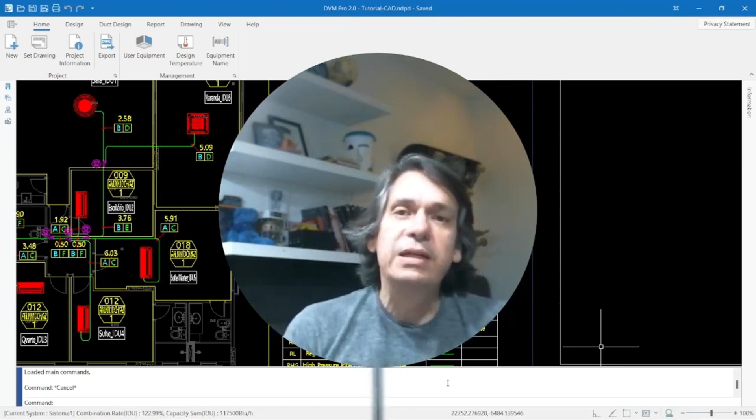Which is very simple, very easy to use, but it also has CAD mode, a very cool tool available completely free of charge, which allows you to design and draw your VRF system directly on a DWG plan without needing to have a CAD program on your computer.

CAD software, as everyone knows, is extremely expensive, and here we offer you the option of creating a VRF project on a plan drawn in AutoCAD using completely free software.

You can receive a plan from your architect, make your project on it, position your machines, return with this plan to the architect, and he will lay out the electrical, ceiling, and everything else.

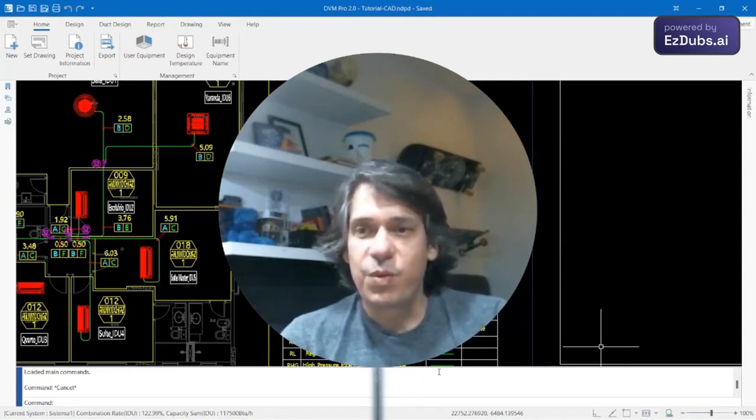Thank you, let's go. So we open the initial window of our software here. I assume you are already creating your flowchart in sales mode, which is the program's default mode, okay?

And we will now do in the designer what would be CAD mode. So let's click here on CAD mode.

First step, new, let's make a new program. As we are talking about CAD mode, most of the CAD programs, the commands, are all in English, so we think it's better for you to work in this mode. If you change the program language to English in the settings, it should already be set to Portuguese by default. So we come here to general configuration and set it to English. I've already done this. You will change it from Portuguese to English. It will ask to restart the program, and when you open it again, it will be in English.

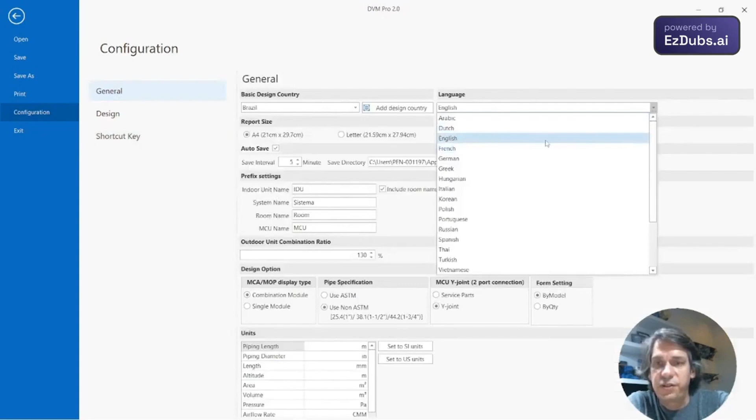So let's go here to new, which is a new project. Our project here will be the Tutorial-CAD, country Brazil, city - I will put São Paulo.

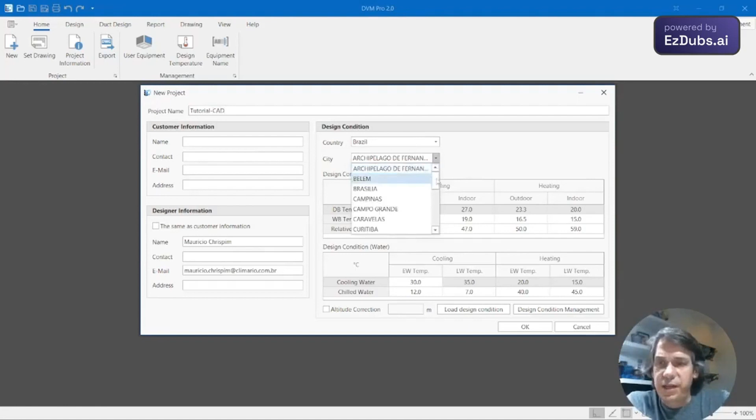Second point, we have to have a drawing. It's already ready in AutoCAD. You can start drawing straight away, but you are creating a project. It is assumed that you have an architectural plan in DWG, so you have to import this plan in DWG - the one the architect sent you.

So set drawing. We're going to pull our environment here, it's an apartment, a residential application. We're going to condition 6 environments. We have a living room, a balcony, an office, a master suite, another suite, and a bedroom. There will be 6 evaporator units of different types. As it is an apartment, it only has one floor - we will provide this information here.

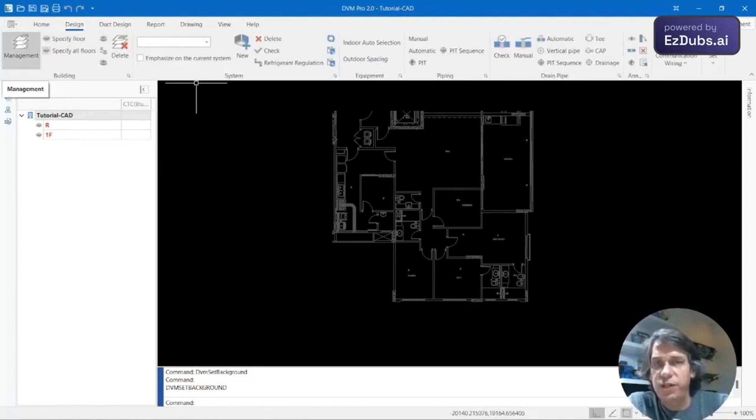So now in the design part, we come here to management, which is the management of our environments. I click here on management. Right away, it's going to show 2 floors, which would be the first floor and the second floor - it would be roof, it would be coverage. So this first one, this floor here which is the coverage, I will delete, erase.

Important information here: it says floor height - that would be the height between floors - and here ceiling height, which would be the height from the floor to the lowering, if any. In this case, it will use the standard lowering, then the standard height, 3000, 2800.

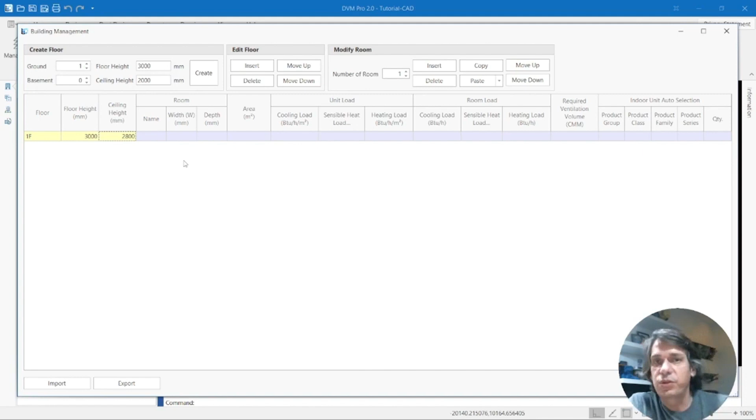All measurements here in the software you have to use in millimeters. So your CAD drawing, for example, if a wall is 3 meters, in CAD it will have to appear as 3000mm. If you have it in centimeters in your drawing, you will have to rescale it to make it millimeters, okay?

As I said, there are 6 environments, so we're going to insert, modify room here - insert 6 environments into our project. Insert, insert, insert, insert, insert until you get the 6th one, okay?

Our first environment will be the living room. Second environment, the balcony. Third room will be the master suite. The fourth room will be the suite. Fifth environment, the office, and the sixth room is the last room. It will already be appearing here in red: first floor, living room, balcony, master suite, suite, office, and bedroom.

Okay, I'm going to change this one. I'm going to remove this 'first floor' and I'm going to call it apartment 601. Our first point, click here on apartment 601 and come to the specify floor window - we will tell you where this floor is.

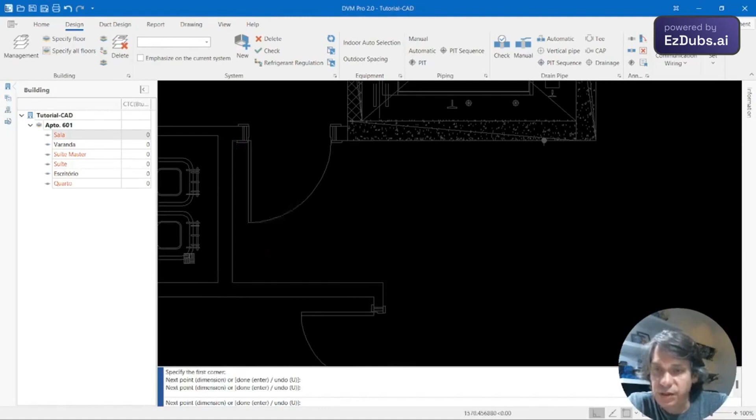Then it asks me for the first corner. I come here too. Second corner, third corner, it already starts to open an area. Come here for my third point, fourth point, fifth point, sixth, seventh point, because it didn't get it right there. Okay, my room is now selected.

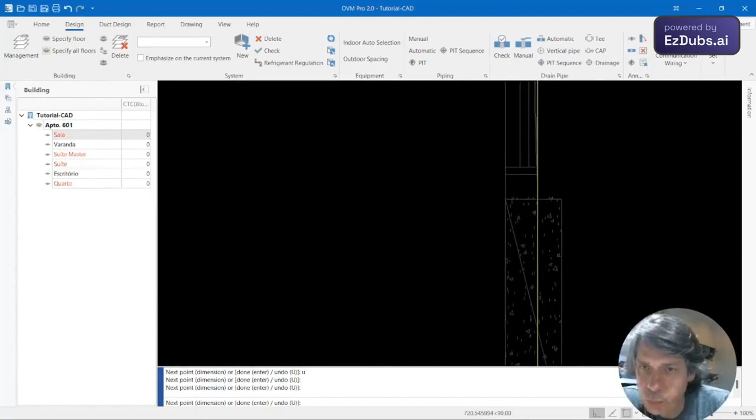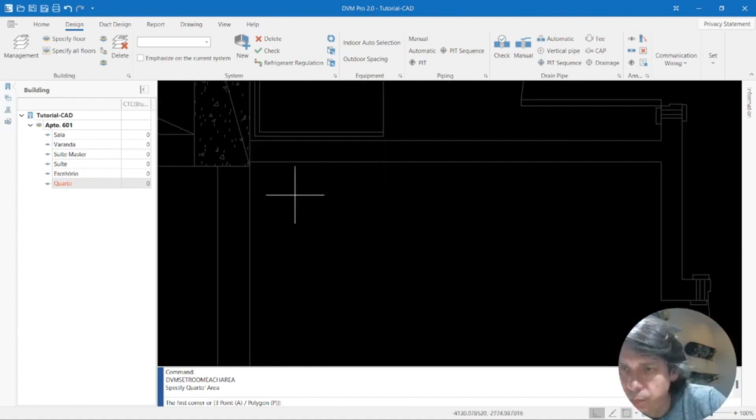And now our last room, which is the bedroom. Specify room, and now our last room, which is the bedroom, specify room. Okay, I have my 6 areas.

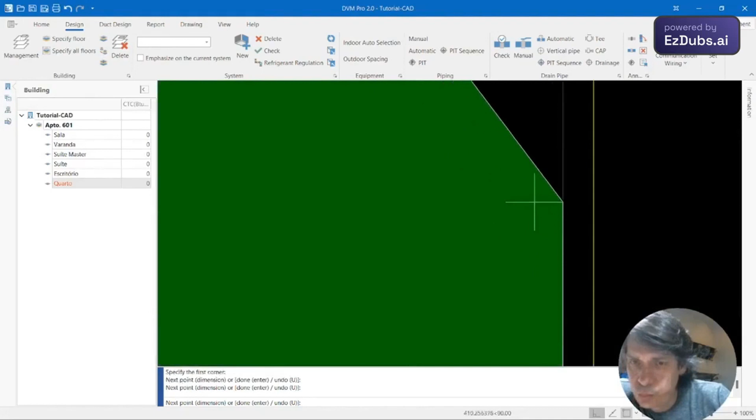Let's see what it is showing in our environment. It is now showing the areas of each of my environments. In other words, my living room is 41.83 square meters, the balcony is 28.67, the suite is 20 square meters, and so on.

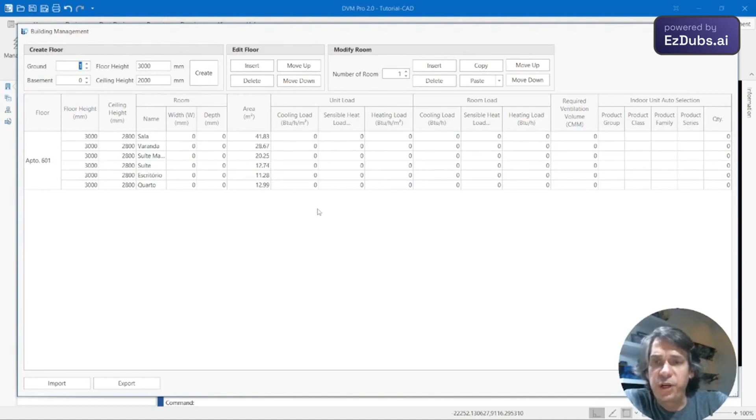We can put the thermal load here directly from this point, the thermal load from our environment, or here we can set a thermal load in BTU per square meter.

Typically, for most environments, 800 BTU per square meter is more than enough. We will do this except on the balcony, which is an area that gets a lot of sunlight. So I'm going to put 800 BTU per square meter here. It already calculated that I would need a...

33,464 BTU machine. On the balcony, we will put 1,000, which is a gourmet area that receives sunlight. In other environments, I will comply with 800 per square meter - it tends to be enough.

We can also indicate here what type of evaporator will be used - indoor unit auto selection.

So I'm going to put it here, and we'll put it in the room. It's all VRF, right? DVM.

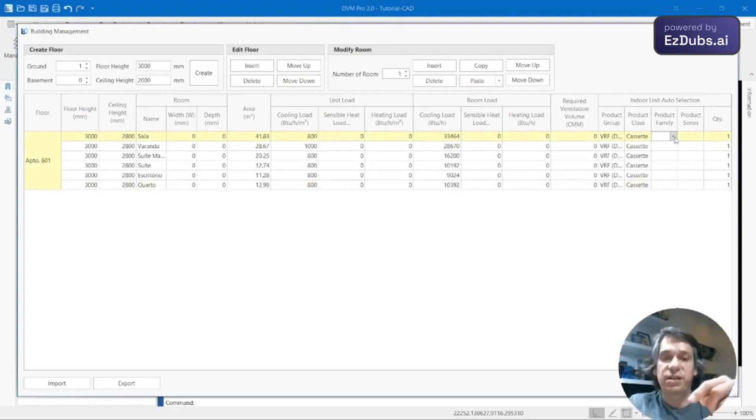Cassette product family - we have some types of cassette: 360 cassette, 4-way cassette, compact 4-way cassette, 1-way cassette. So in the living room, we will use the 360 cassette.

On the balcony, we are going to use a 4-way cassette. In the master suite, a 1-way cassette. In suite 2 and the other rooms, all 1-way cassette.

I particularly like the 1-way cassette a lot, not only because of the design, but because it has a built-in drain pump, which greatly facilitates draining condensate.

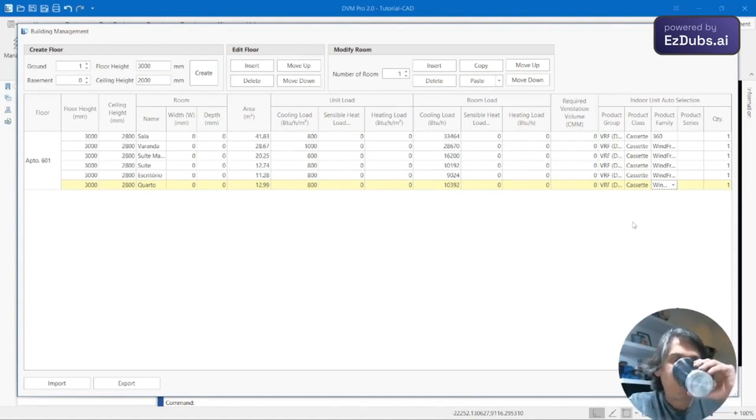For some products, it also asks for the series. Here it doesn't ask, but for the cassette, it asks for one copy. So we put it here, VRF one-way, and that's it.

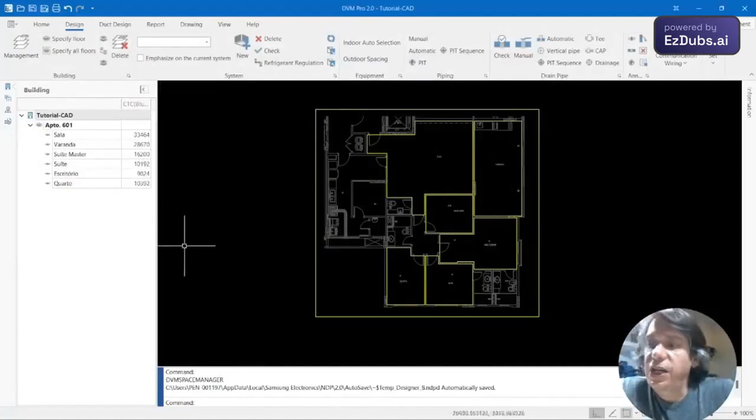So now I already have my evaporators previously selected. I have to find where they are. Now I have to use the command Indoor Auto Selection.

Let's put it here. It says I asked for Indoor Auto Selection, then it said there was no active logical system - I hadn't started making a system.

So I come here, at home is for the setup of my system design. So now that I'm going to start my system, I'm going to put new system.

What type of system is it? It's a VRF system. Ready? Now I came here in my indoor auto selection. So what objects? It says here, select rooms to place indoor unit automatically. So select the rooms for you to position your internal units automatically. So let's select here. Right click on the line, select. I selected all my environments, ready.

Good to see now that I already have equipment here, that is, it has already defined equipment. It's in room 1, 36 machine on the balcony, a 30 machine, on your others have an 18 machine, a 12 machine in the office, 9 in the other room, the 12 machine. Now we are here in the equipment, we come here, click on this button here, and it will place unconnected equipment.

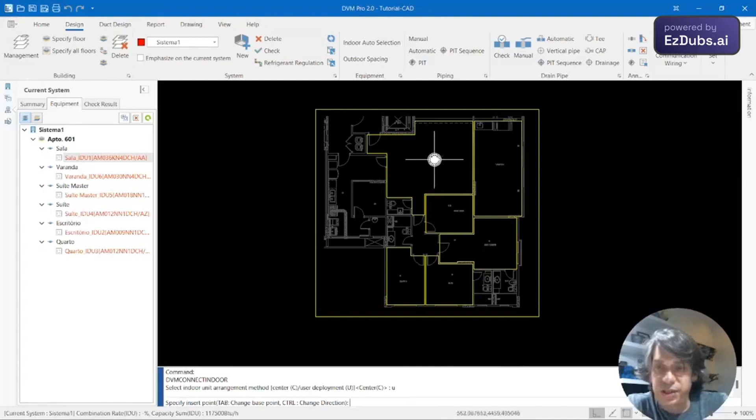Then I will connect the equipment in my environment. So let's go. I click here on this equipment place, okay? And it will ask, select indoor unit arrangement method: in the center or user defined. So I'm going to say that it will be defined by the user. So I put the letter U. So my unit now appears here. I will position it more or less here. Okay, enter, and it has already placed the room and the model unit of the equipment used.

Let's go to the balcony now. I click here to position it. On the balcony, I'm not going to put the position I defined. Let's put it in the center. I'll put the letter C, and then you put the position of the unit or select the room. So I'll put the R here, okay? I'll select the balcony. It's already put the machine here in the center. It also asked about the angle. The angle will be 0. My machine is already positioned on the balcony.

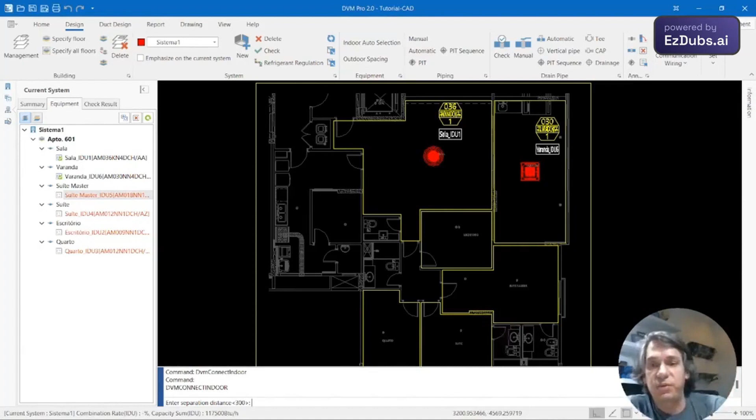Let's position the master suite machine. It shows you here the separation in relation to the wall. Normally the cassette is one way. You move it away from the wall. Standard 30 cm. But I'm going to put this master suite. It gives 300 mm here. And it says the point you want to set, and by pressing the control key, it rotates the unit. Then pressing control once will rotate the unit. I'm going to position our machine more or less here.

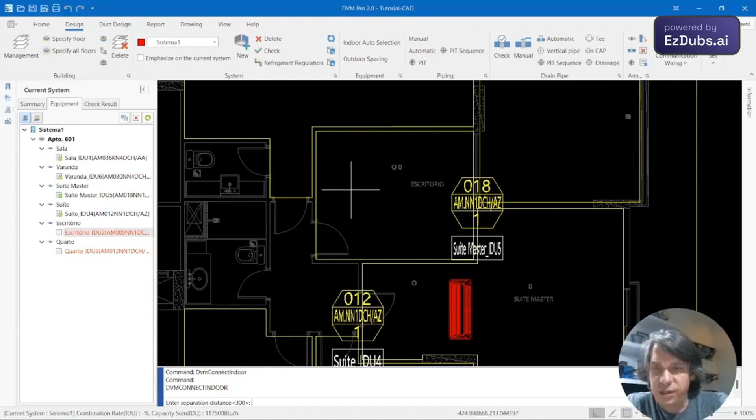In the last one, now the office where we will place our machine. 300. The separation, 30 centimeters of separation, control to move. I'll put it here. There must be a closet, so I'll put the machine more or less here in front of the closet, okay?

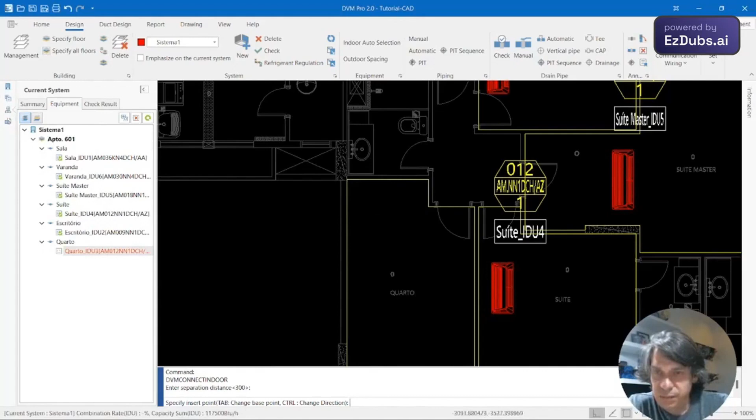So our drawing won't be a little polluted, I'll center the model of the machines a little more here in the environments. How do I change this? The base point is here. Take the snap object here, up to here. If I press enter again, I repeat the command, enter, which point, move here, enter again, move here, enter again, move here. The balcony and living room are fine, okay?

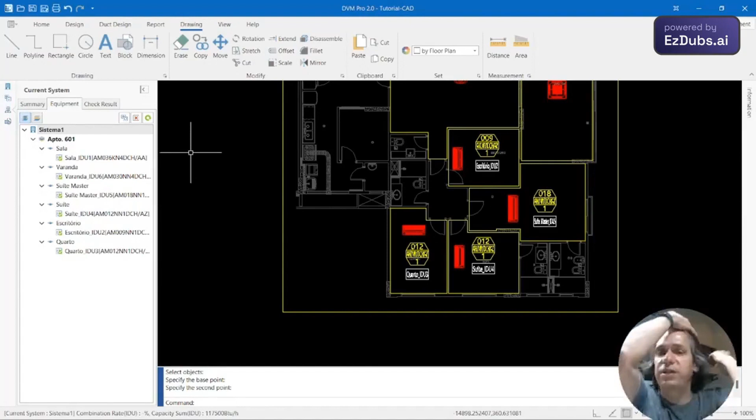What do I need? Now place my condenser unit. I already know that a 10 HP condenser unit will work for this environment. So let's go here to Design. Outdoor unit, external unit. So it is here, in the second point here, there is piping material. Outdoor unit, indoor unit. So outdoor unit, what type of unit will I want? I'm going to want DVM S Eco heat pump, which is the hot and cold one.

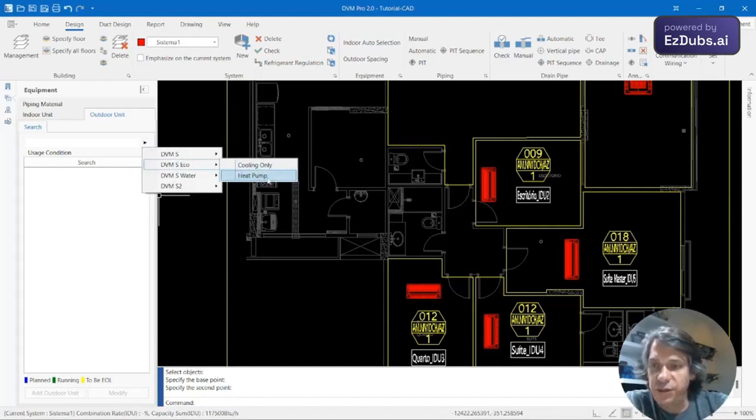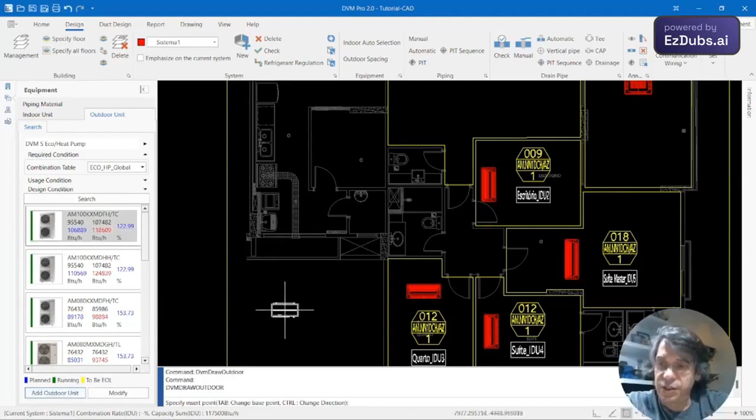What model would it be? We have HP NA, which is the product available in the United States, in North America, or global, which is what is available in Brazil. Maximum allowed simultaneity of 130, check here. I'm going to pull the 10 HP 220 machine, which is here. I click here, add unit. I'm going to put it here on this balcony. It will stay here. Zero angle, press enter so our drawing doesn't get polluted. I'm going to move this item like I did with the others. Okay?

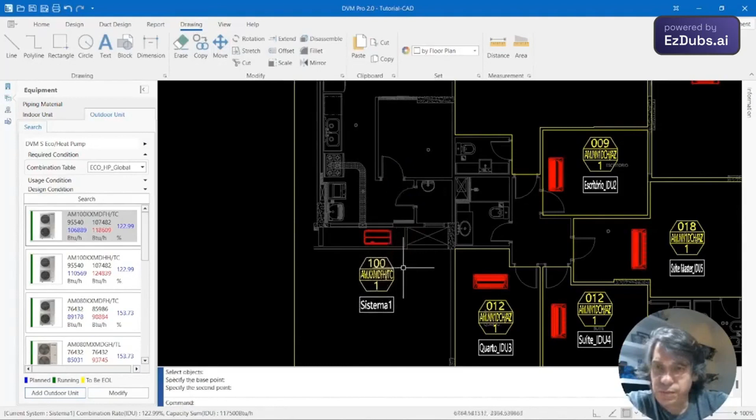And now we have to make our piping. Let's go. So first thing, I'm going to make a central piping. And I'm going to ask the program to connect my internal units. You'll see now that we've done the longest part, the program will draw it for you. So I will now go here to design and then piping, which is manual piping. I will do manual. This is the central piping.

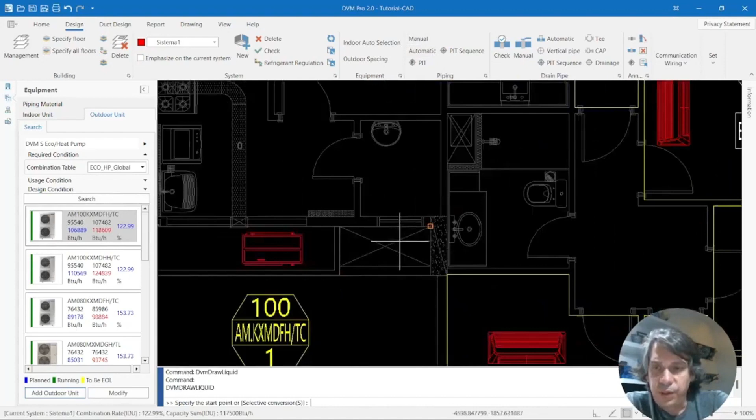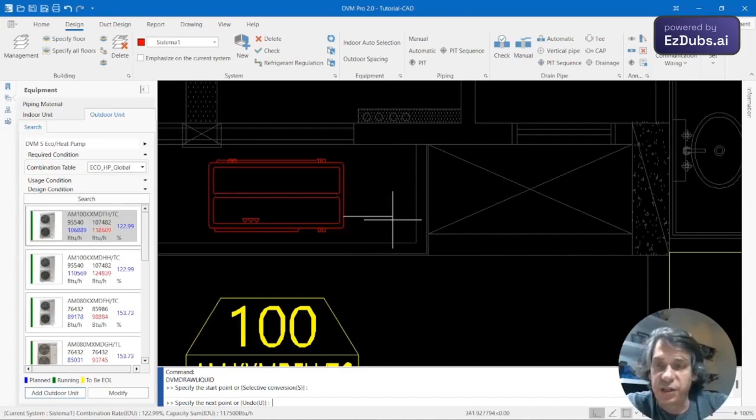My piping will come out of my condenser. I don't need to inform you that it will be uneven. The program will calculate this. It gives the points where I can leave. I'm going to get out of here. And I'm going to set this to an orthogonal system, so that it only moves at 90 degrees, which looks more beautiful in the space. So I'm going to walk a little bit here horizontally. I'm going to go up. The pipe is going to go through here, come here, and I'm going to bring my main pipe to here.

I press enter. It has already made the curves here, and my main pipe is already here. So what am I going to do now? He selects refrigerant pipe material. Then select the refrigerant piping. I selected the piping, and it now asks for the internal units that will be connected to this piping: 1, 2, 3, 4, 5, 6. I'm going to press enter, and it's already put all my pipes here. Okay? I hope you are following along from a distance.

Then he says, do you want to change the direction of the refinements? They are in the right direction. Okay? Shall we make a mistake on purpose? To see what happens, I'm going to say I want to change the direction. I'll say yes. He will take the refinement and change the side of the refinement. Yes. Okay? But that wasn't what I wanted. So I'm going to press enter here, and I'm going to ask him to undo our command. Okay? Let's go again.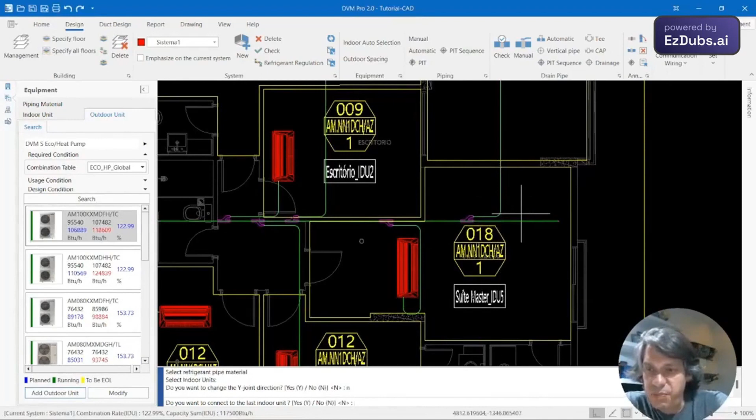Automatic. Okay? So I select the tube, and now I select the internal units. Selected. He asks if I want to change the direction of the refinement. I say no, and now keep an eye on this last pipe. And he asks if you want to connect the last internal unit, which is my last internal unit, the cassette from the balcony. I'm going to say yes, and there he's going to take this refinement. That's it.

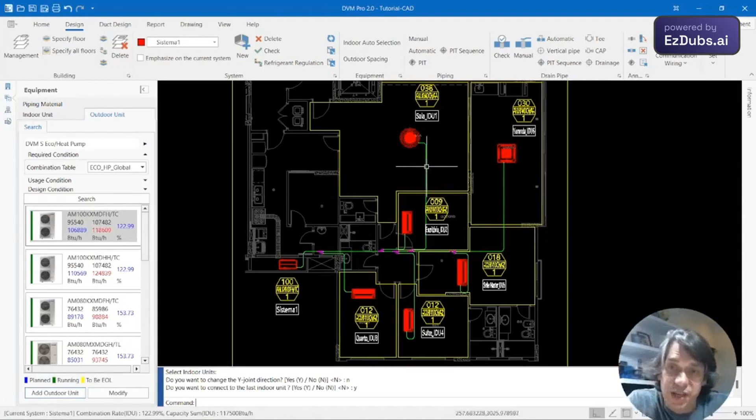My project is ready, but let's say the following. Come on, Mauricio. I didn't want my piping here on the balcony to come from this main piping. I wanted it to come from this piping in the living room. Can we do that? We can. How are we going to do it? Let's go. I'm going to delete this here. And I'm going to delete this main line as well. Drawing erase.

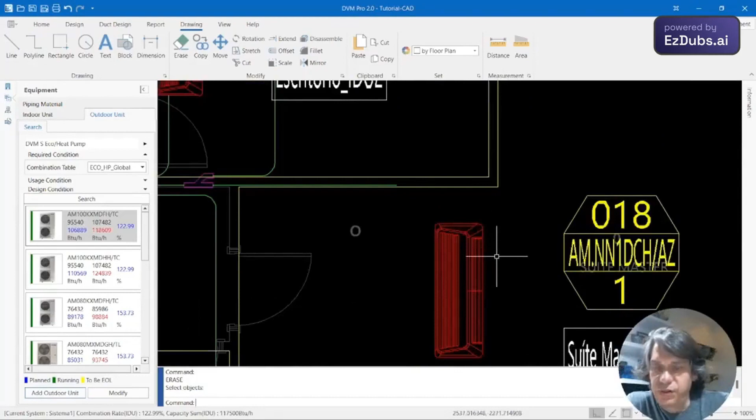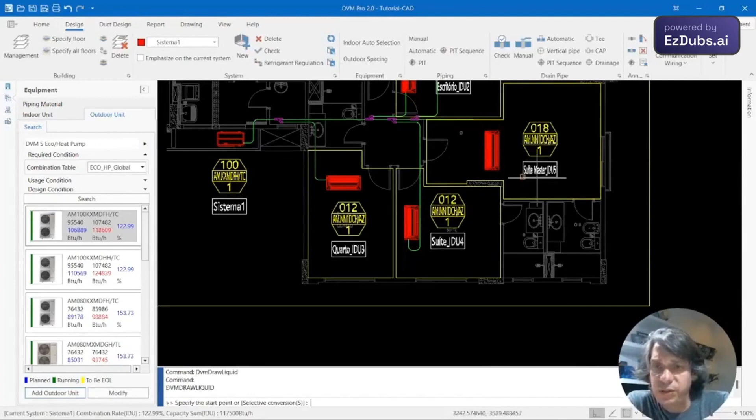So first thing here, I'm going to connect. Oh, interesting. He already places the right side of the connection when you're doing the project. Puts it on this side. He already makes the piping connecting on the right side, where it connects to the cassette. So I'm going to come here. I'm going to do a manual line now. I'm going to connect it here and ask for it to be orthogonal here. So I deleted all the lines, and I'm going to bring it here from this refinement to my last machine manually.

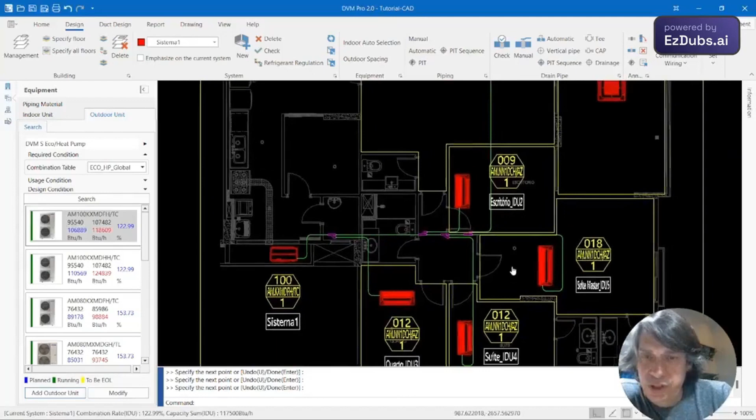Okay, you've made the connection. And from here, I'm going to bring it to this one. Come on, manual. Here. It put the refinement on the wrong side, I'll have it changed. And that's it. Okay? My flow chart is ready. What could we do? Check if there's an error in our system, right?

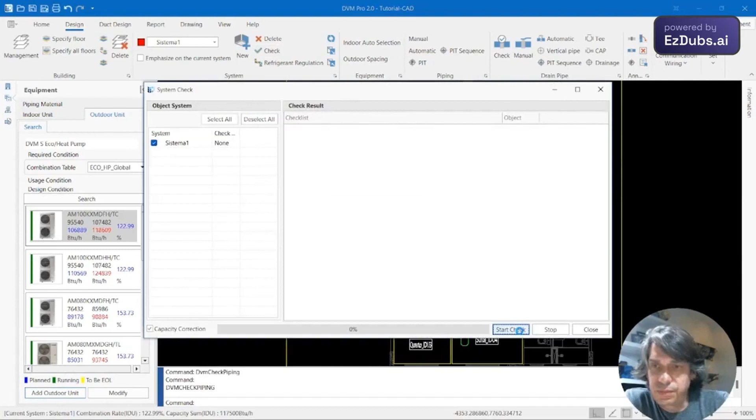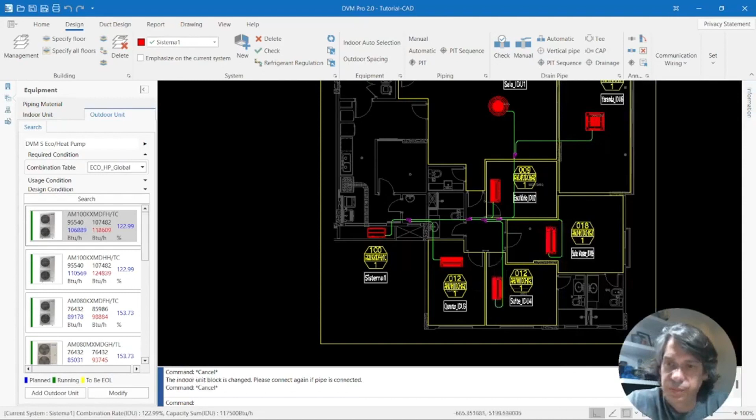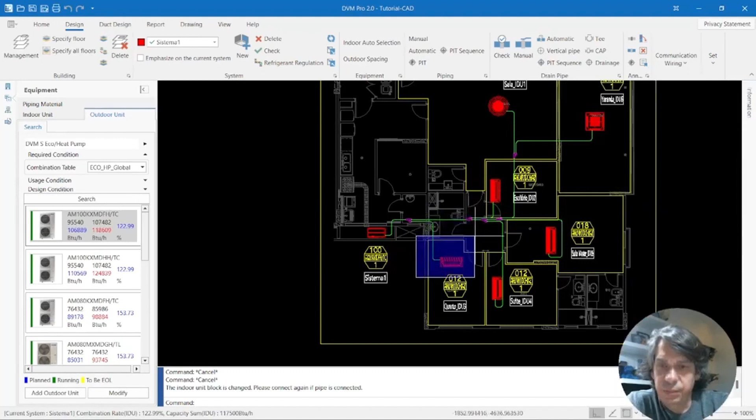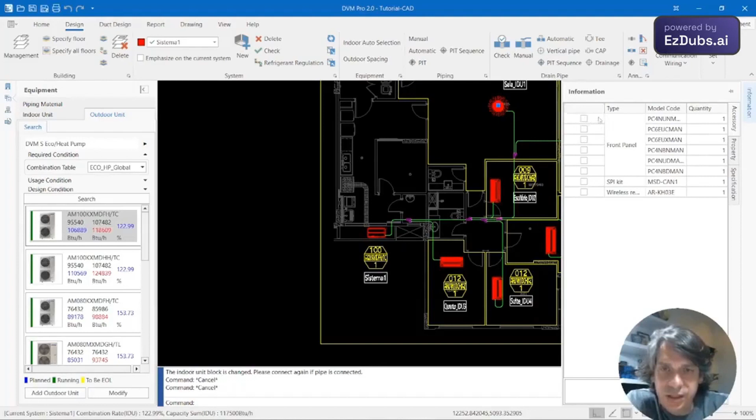In this equipment here, same thing. I click information, front panel, and the remote control, which is this one too. This one, come on, panel, remote control. The panel of the one-way cassette that is sold, of the 360 cassette, is this one. And the remote control is this one.

Let's see if everything is okay now. Come here, check, start check. Ready. I've already run my flowchart. My system is ready. He said that the longest tube is 18.85 meters. It could even be 160 total length. It gives all the features. The height difference between the outdoor unit and the indoor unit is 2.8 meters, the height from my floor to my ceiling. Factory charge 3.70, additional refrigerant charge 3.84.

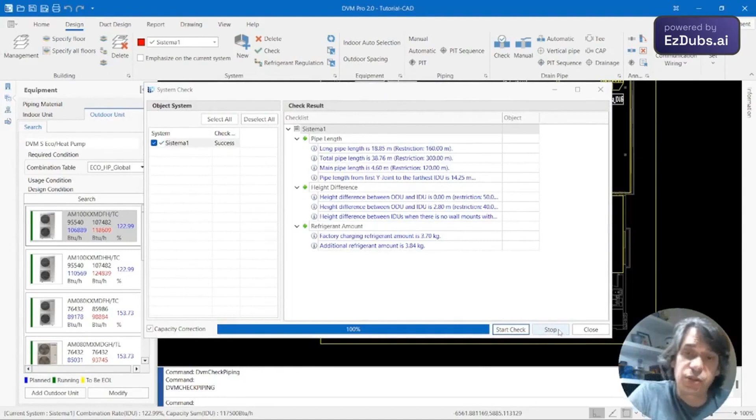Is my project finished? No, my project is not finished. Now I can also enter the dimensions of the tubes. I can make my hydraulic and condensate lines, and I can also make our communication cable.

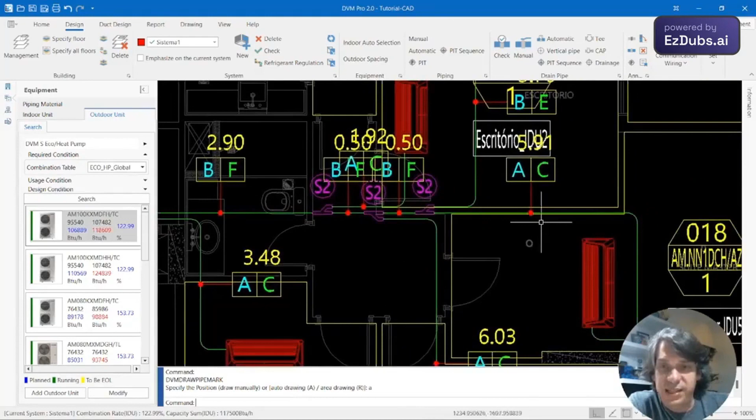Then you will see the following: it is informing here that this first section has 1.80 horizontally, but in the flowchart it will add 2.8, this one has 2.9, here it has 0.5. And here also in BF form, what is this? AC. AC are the diameters of the pipe. I think it will be in a legend that we will insert in our drawing too. So I'm going to undo this command and put the measurement pipe by pipe so our drawing doesn't look so polluted.

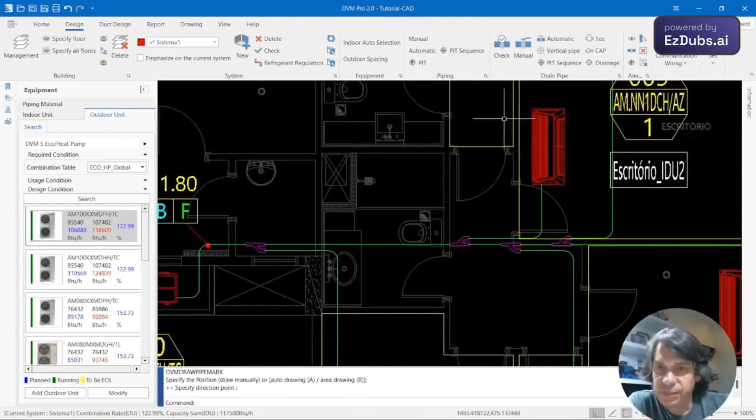So let's go. I'm going to do it manually here. I'm going to put this one here. Okay, let's go back to this one here. I'm going to take this object snap here. This section here, let's see how much it gives. It will probably be 50 cm. This is 50 cm. This other section here, also 50 cm. This section, I'm going to put 1.92 meters on this side. This section I'm going to move a little so that nothing is on top of the other.

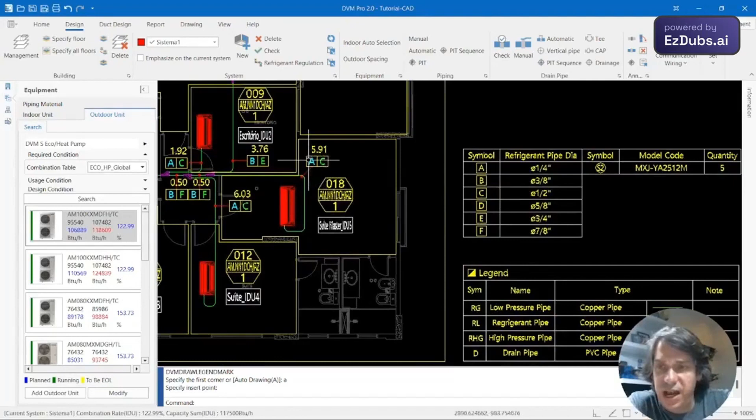And here I can even put the caption. So let's go. I insert my caption here. So now I know what it is. When you have the letter A and C, it's the 1/4 and 1/2 piping; here the piping is B and E, 3/8 and 3/4; here B and D, 3/8 and 5/8 piping. Okay, so some more information here in our drawing.

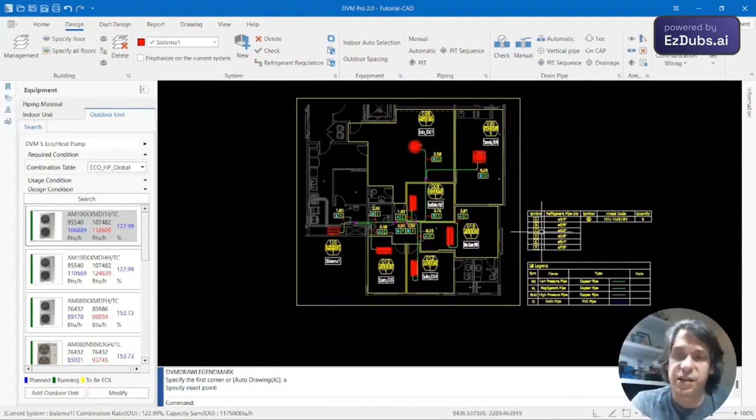What's missing here too? We still need to install the refnets. So I come here in this same place and select the item I want. R. I'm going to make a little window here. So I select the 3 of them here. You don't have to delete anything. Let's do this command.

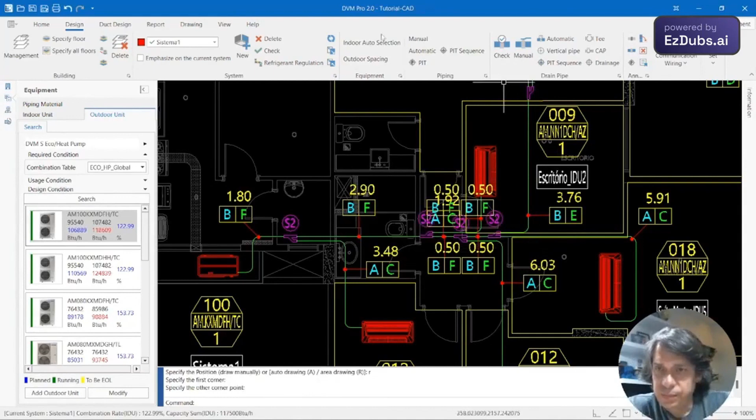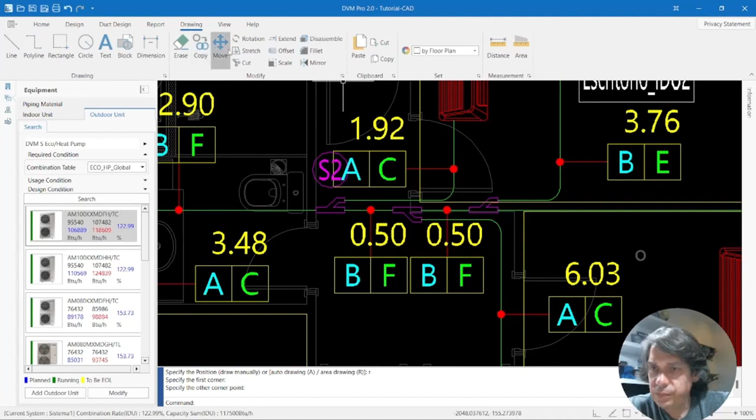Let's go. A. I'm going to move it. It's 2. Let's see it all. Let's do the same refnet. Then R, I make my window here. Let's do 2. Okay, what else is missing in our drawing?

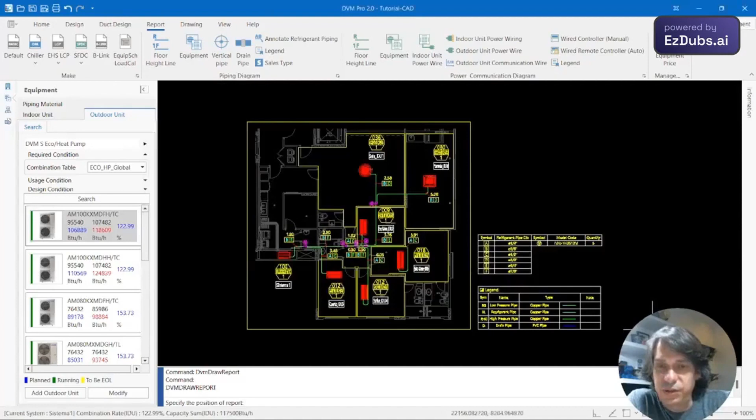Could do condensate line. Now we can get the reports here. Make the default here. Put everything you have in our report. And we're going to paste the report here in the drawing. I'm going to cancel it here. And it's going to paste the report here in our drawing. Everything that we were used to having in the report, it put here. What are we going to have here?

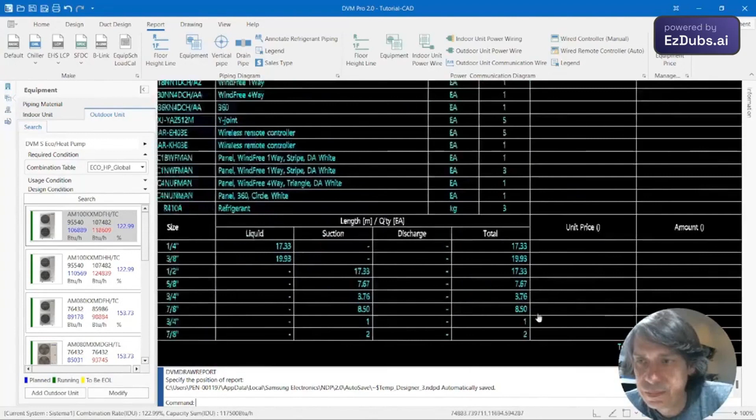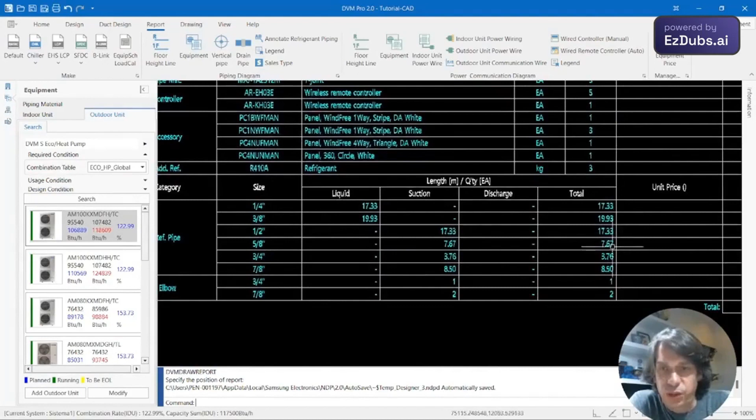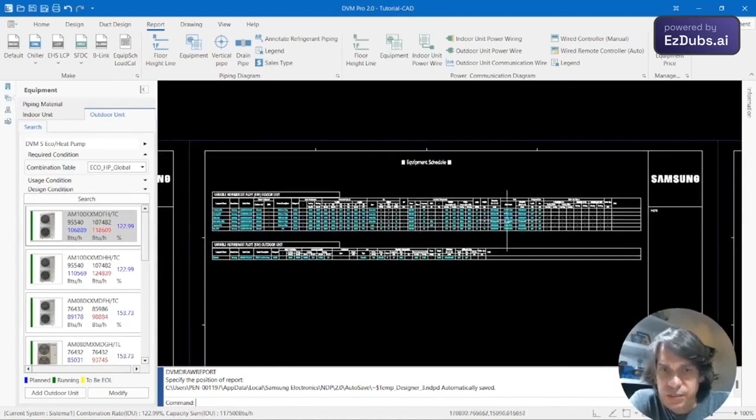The equipment used, the quantity of each of them, quantity of accessories, the pipes, the total length of each pipe, the liquid line, suction line. You will also have the characteristics of each: nominal capacity, corrected capacity, model. You will also have the performance data of the equipment. So all the information contained in the report, dimensions, electrical characteristics of each piece of equipment will all be here.

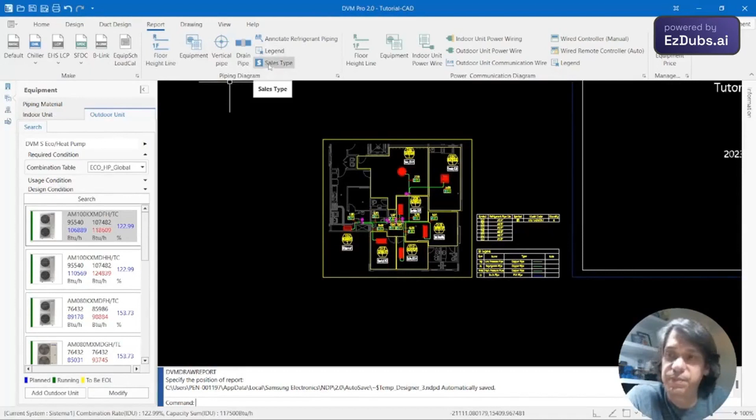What is missing? We're missing that traditional flowchart that we can do here too. I come here, if I'm not mistaken, this one here is the sales type. Let's go. Activate system. Okay, I can paste it here too in my drawing. Let's zoom in to see: it shows our internal unit. Look how cool it was here, what it considered.

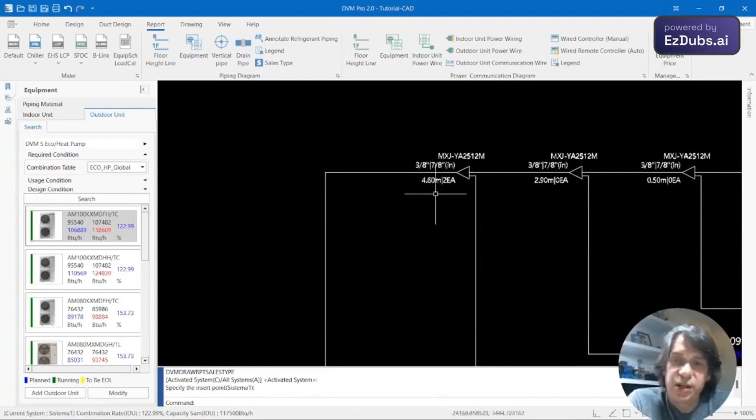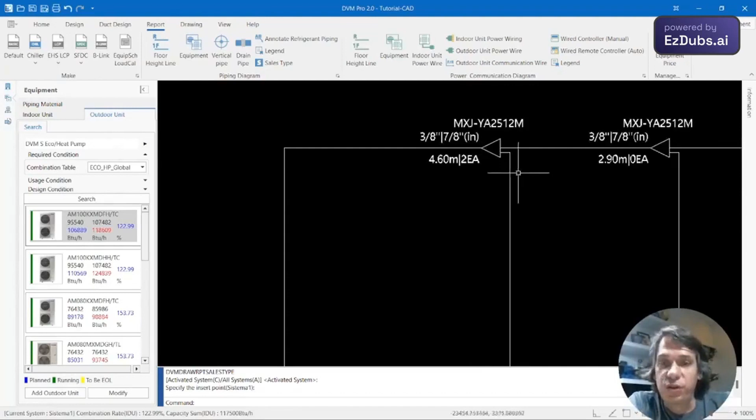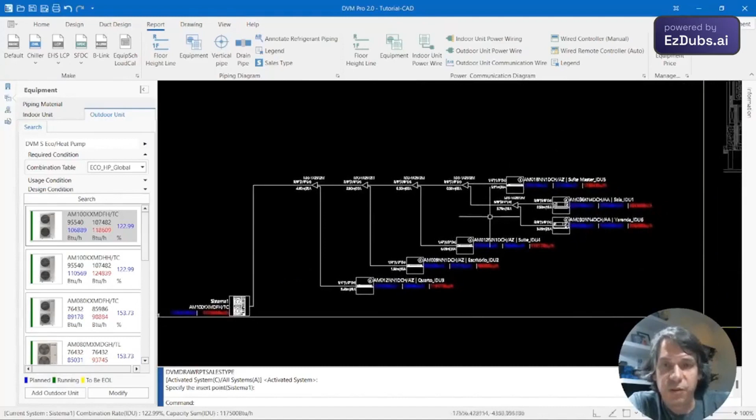It considered the total length to be 4.6 meters. Why? Because it considered that I'm going to go up, because it's going to be above the ceiling, and that there are two curves, 2 meters. So it also informs the curves here. So for the room here, it is 1.92 meters and has a curve. It informed everything here. So it's a very cool program.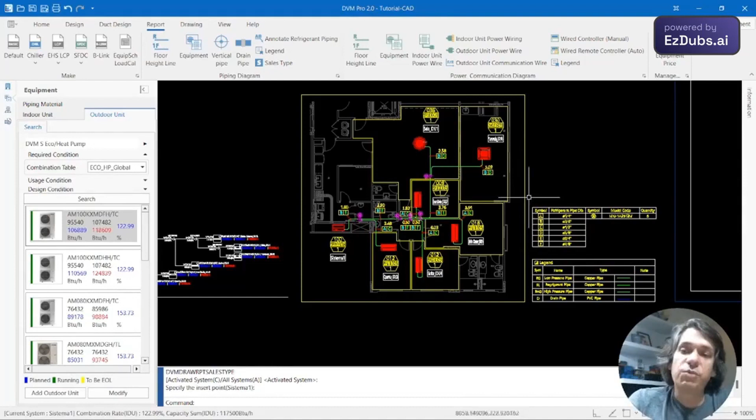You receive a quote, an architect's project. You are able to use his plans to create your project and hand it over to the installation staff, so the architect can work on your design; it becomes very practical. And the coolest thing is that you can do all this without having a CAD program on your computer. AutoCAD is very expensive. We're not going to talk about pirating here. It doesn't make any sense. So you have completely free software that allows you to draw projects directly on an AutoCAD plan.